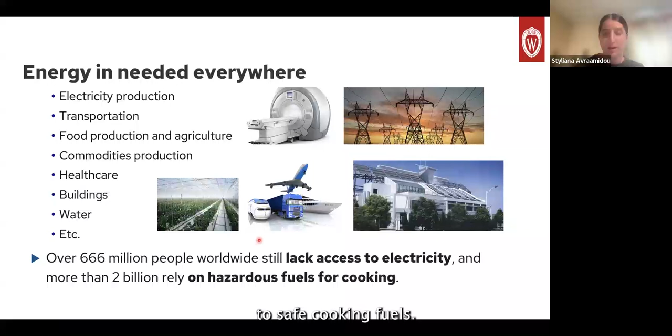Okay, so I'll start with a bit of motivation. We know that energy is needed everywhere. We use electricity all the time for our day-to-day tasks, and industry uses a lot of electricity. We use a lot of heat, transportation. Our food systems need so much energy for water transportation, irrigation, fertilizers, cultivation, and everything. So energy is super important for everything we have right now. At the same time, a lot of people don't have access to electricity or to safe cooking fuels. So we need it everywhere, although it's not everywhere.

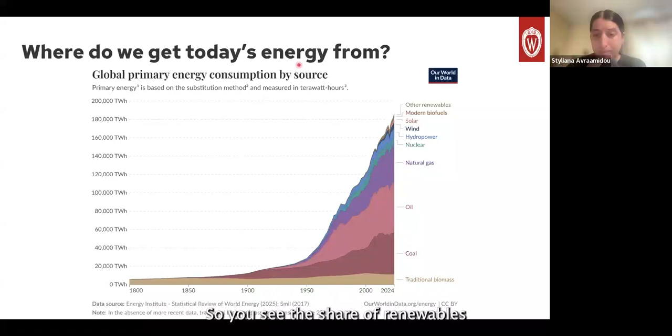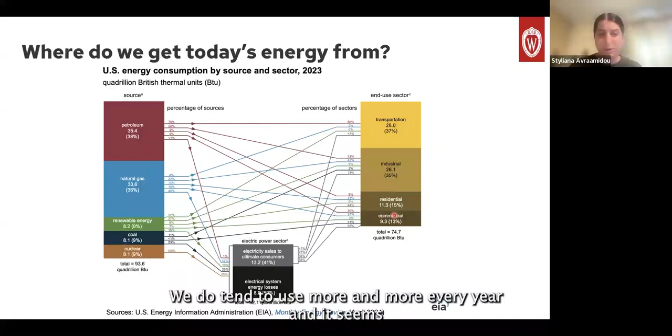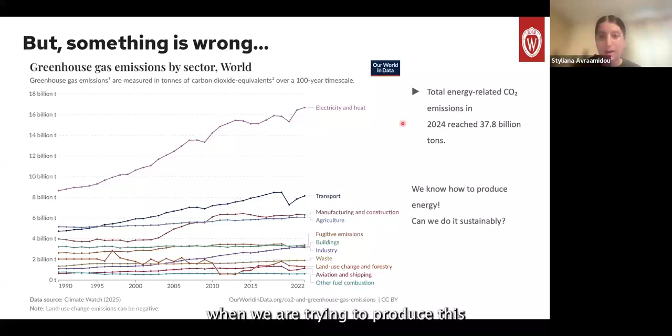So it seems like we have a lot of energy. We tend to use more and more every year, and it seems that we are good at producing it, but there is something wrong. All of this energy creates a lot of greenhouse gas emissions. We see here the amount of greenhouse gas emissions produced just from electricity and heating. Transportation is another huge part. We can clearly see that a lot of emissions come from the energy sector. So we know how to produce energy, but we are in a bit of trouble when trying to produce it sustainably.

Okay, so can we produce sustainable energy? And I'm sure that you know about a lot of techniques and processes and infrastructure that we can use to produce sustainable energy. We can increase the penetration of renewable energy sources. The technology is there. We can do more solar, wind, geothermal, etc.

We can improve the conversion technologies that we already have, our processes to become more efficient. We can introduce more heat integration to make our processes more efficient. We can even introduce technologies for CO2 capture and utilization that can help our energy systems become more efficient. And here I have a representation of some of the options that are out there.

We have many different primary energy sources. Some of them can be renewable, some are not. Then we have conversion technologies like turbines, solar panels, gasification reactions. We can convert energy to either electricity or some energy carrier, for example, hydrogen or natural gas. So we can transport it throughout the country or from country to country to then use it at the end for the end use. So we have all these technologies.

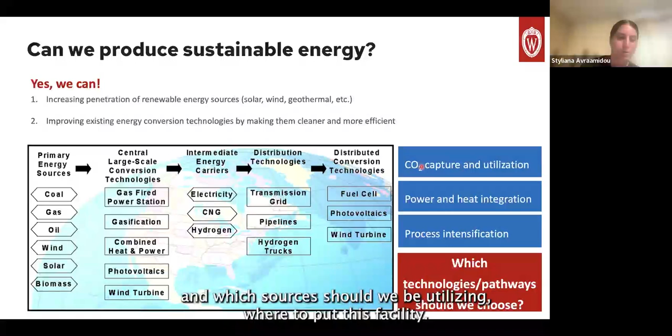Some of them we use more than others, but when we're considering decarbonization or moving to a more sustainable energy system, it's not clear which technologies we should be choosing and which sources should we be utilizing, where to put this facility. So that's what we are working on. The other thing is, should we just focus on greenhouse gas emissions? Are they the only challenge to our sustainable energy transition?

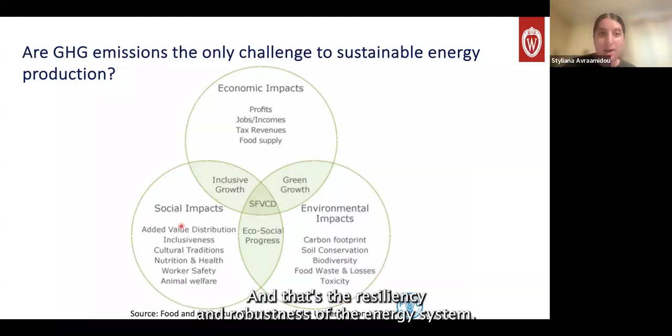And then it's not just the environmental impacts. We should at the same time be looking at the economic impacts and the social impacts that will be affected when we come up with a new energy system or when we're in the process of transitioning to a new energy system. And then I think there is something missing still from this diagram that is trying to capture all of these impacts that we are after, and that's resiliency and robustness of the energy system.

So I'm sure many of you have heard about the blackouts in Europe, in Spain and Portugal, or the grid failing in Texas a couple of years ago, and the issues that they still have in Texas. So we want to transition to a system that is resilient and that we're not at risk of losing power and risk of the grid failing with weather conditions or with demand fluctuations and so forth. So that's another objective function that we need to keep in mind.

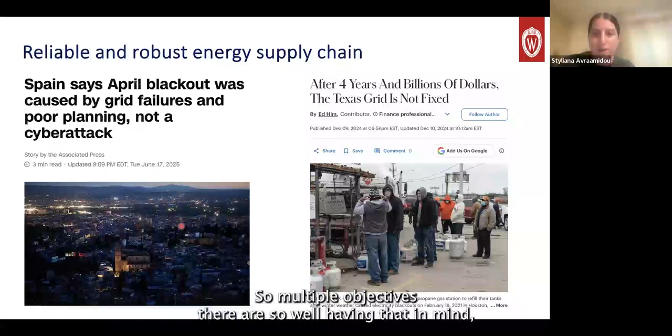So we have the environmental impacts, we have costs, we have social impacts like job losses and so forth, and then we have also the resiliency of the electricity grid that we need to take into consideration. So multiple objectives there. Having that in mind, we need to come up with answers to a bunch of questions, and I have here some.

So where should we produce the energy? Should we produce in a location that has a lot of sun and wind, or should we produce somewhere that there are a lot of people and need energy, or industries, or should we be transferring energy from one place to another? What are the best production technologies? What are the best conversion technologies? Should we be storing energy somewhere? Should we be using batteries everywhere?

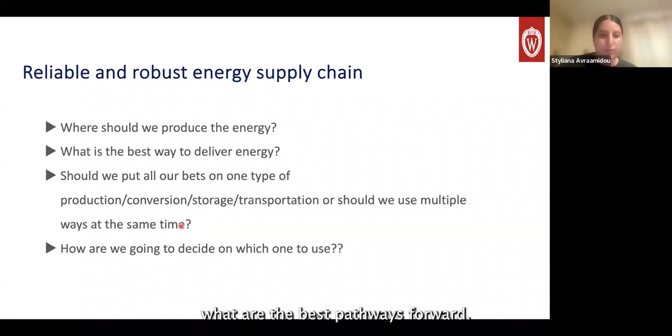There are so many questions, and each person developing a technology or company developing a technology might want to push forward that technology, but we're lacking a bit the tools to consider together all of these technologies and figure out what are the best pathways forward. Okay, so is this an easy problem to solve? No.

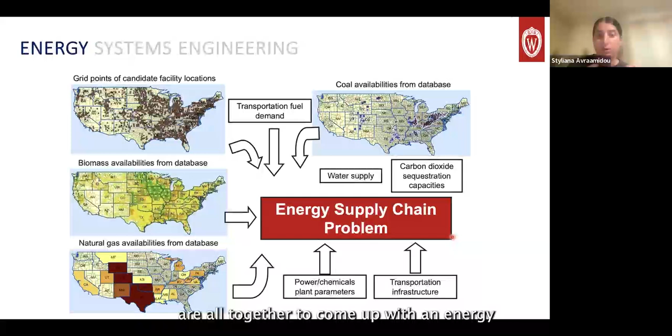So if we just take the US as an example, there are so many candidate locations to put in energy systems. There is different resource availability. So if we want to utilize biomass, we need to take the seasonality and the location of biomass availability into consideration. Natural gas availability is also varying from location to location. And we need to then consider all the transportation constraints and options, and all the demands of power and transportation all together to come up with an energy supply chain plan, essentially. So this needs to include all of our concerns and objectives that we just discussed.

So environmental, social, economic, resilience objectives. We need to connect all of these pathways and technologies as a network. And then out of all these options, that will be a lot, we need to figure out how to narrow it down to a smaller set of best options that can fit our concerns and objectives and help us make

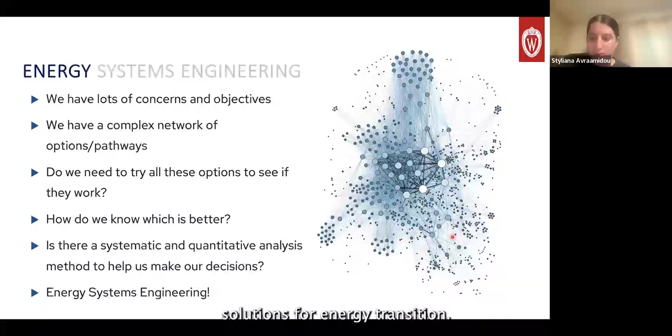these informed decisions. So the question here, do we just evaluate all of these options, or are we going to use any decision tool that can help us navigate this complex network of pathways that we have? And that's what the goal of this field of energy systems engineering is, to navigate all these different options and come up with best pathway solutions for energy transition.

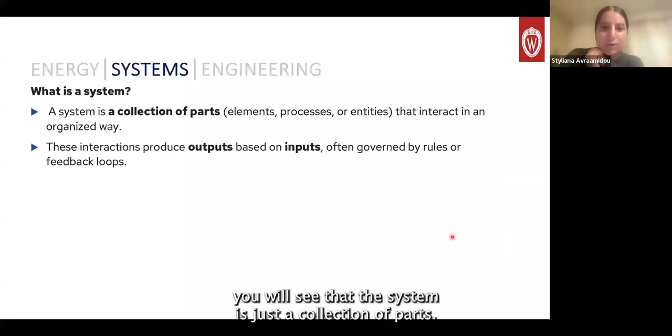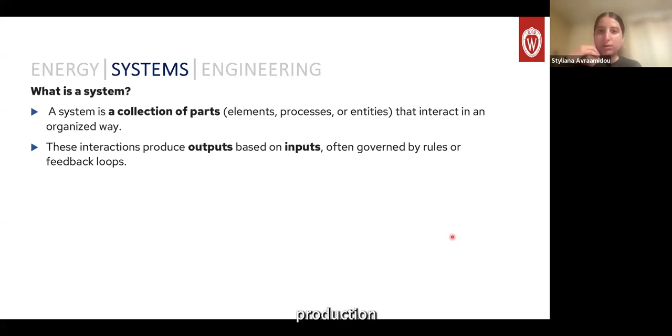Okay, so yeah, it's called energy systems engineering field. What is a system? So if you look into definitions, you will see that the system is just a collection of parts. This can be elements, processes, entities that interact together. So one is affecting the other. And they produce some outputs based on whatever inputs we have. And in the case of an energy system, these elements can be your energy production units, your energy storage units, your energy transmission units, and all the connected parts are going to be the system.

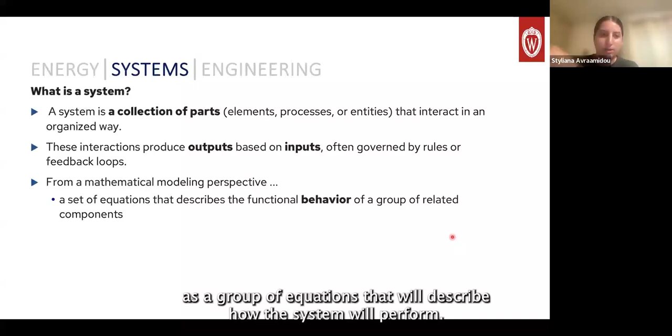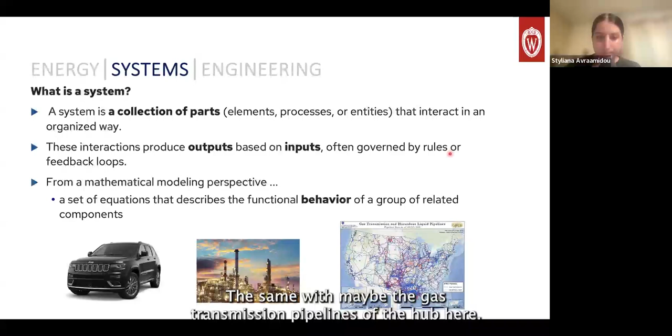Okay, so then what we're doing is again modeling the energy systems. We develop models to accurately represent what's happening in reality. Then if we have this model of what is happening in reality, then we can test different modifications and alterations of that system and see what the output will be. So we can figure out optimized designs of that system without actually doing the changes in real life.

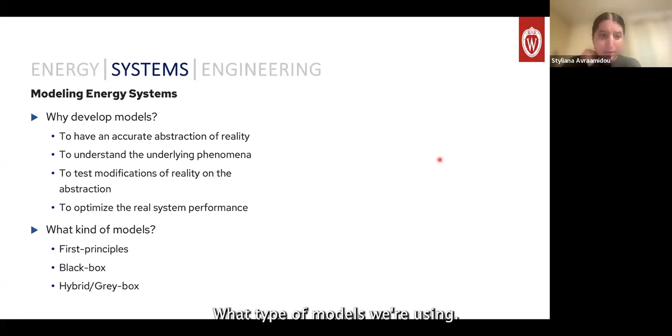What type of models are we using? We're using different types of models. So we have models at different scales and different levels of accuracy. The first principle models are models that use actual physics and chemistry to describe what is happening with a device, a unit, an element.

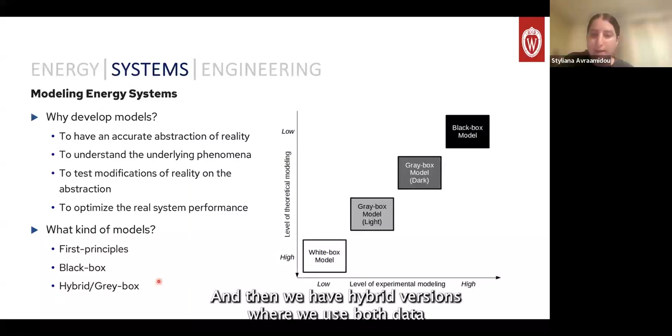Black box models are models that just use data. So if we have a system and we have a lot of input and output data, we can train some black box model that doesn't know any physics, but then it can kind of predict the outputs based on these data that we have collected. And then we have hybrid versions where we use both data and first principles to come up with models.

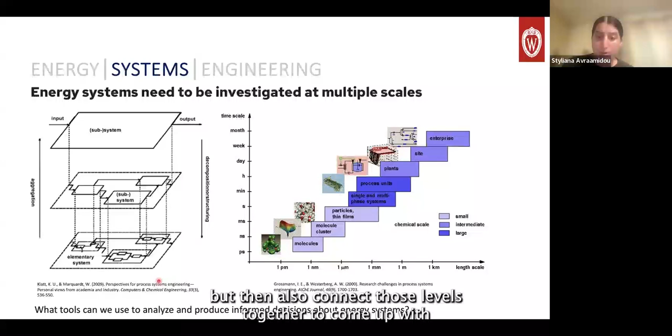Okay, so the other thing that I alluded to is the multi-scale nature of that. We have models of different scales to describe the entire energy system. So we're going from materials and units all the way to plants and power plants, and then connecting all those together to energy grids and energy supply chains. So we can use all these tools to analyze at the different levels, but then also connect those levels together to come up with energy planning solutions. Okay.

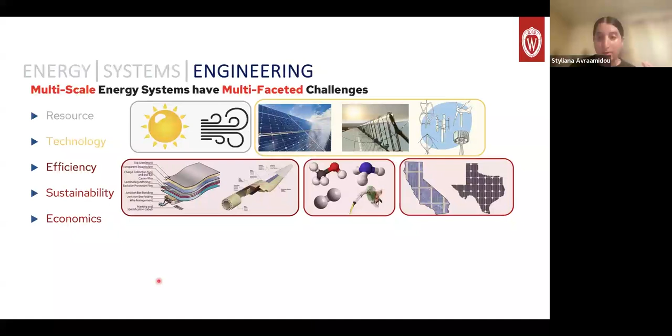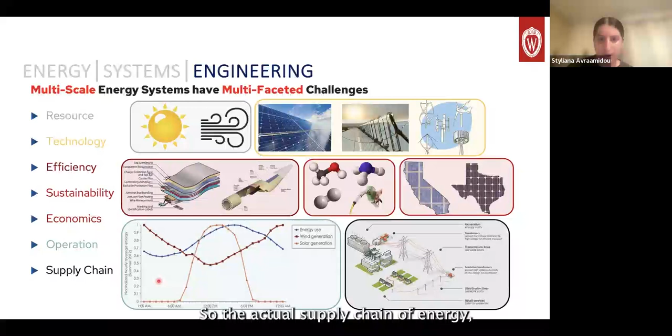Again, this slide is showing the different things that we need to take into consideration when we're building these models, and the fact that they're multifaceted. We take material information all the way to how the energy is distributed through the electricity grids, so the actual supply chain of energy. Okay.

So the models that we develop in my group are based on this multi-scale aspect. We're considering only two scales. The rest of the scales, we have models from other people that we can use. But the scales that we do consider is a short-term modeling, which is deciding the scheduling of our energy use, energy production, energy storage devices, which usually is at the hourly scale. So we have models that predict how energy devices and devices that participate in energy supply chains operate at the hourly scale.

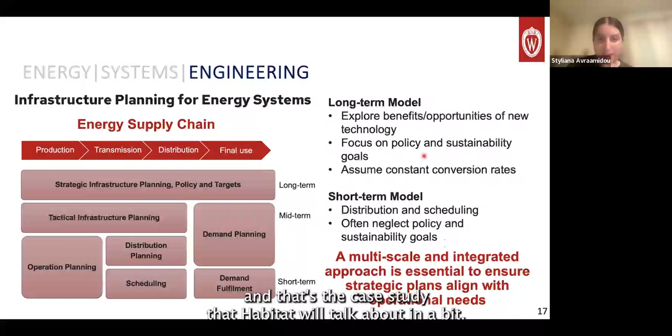And then on the long term model, we are coming up with infrastructure planning decisions. So building or decommissioning infrastructure in terms of energy supply chain at the yearly level. And this can span many years, like 30 to 40 years. And that's the case study that Javiera will talk about in a bit.

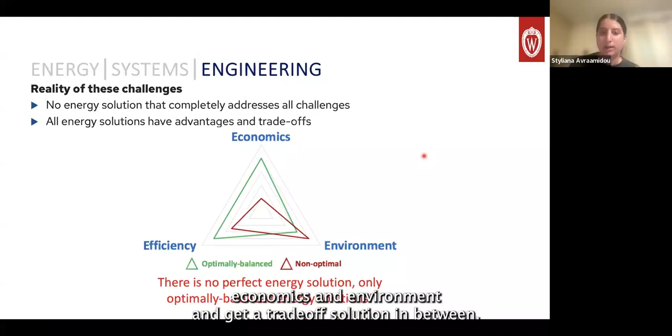So yeah, the reality is that we can build these models, we can get solutions, but these solutions will be good for maybe the economics or the environment or the efficiency, so we can define an objective function. But then we need these engineering tools that I will be talking to you about now to come up with trade-off solutions. So we build multi-objective optimization formulations where we can simultaneously consider economics and environment and get a trade-off solution in between. And I think Javiera will show some of those in a bit.

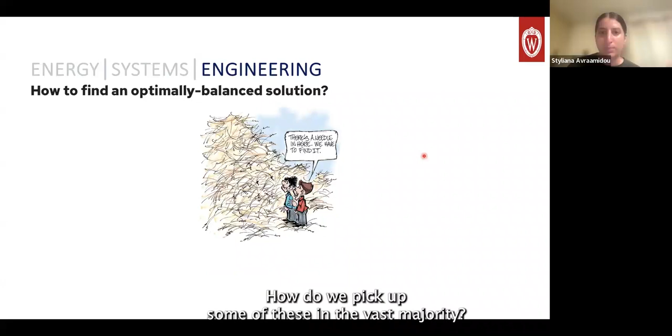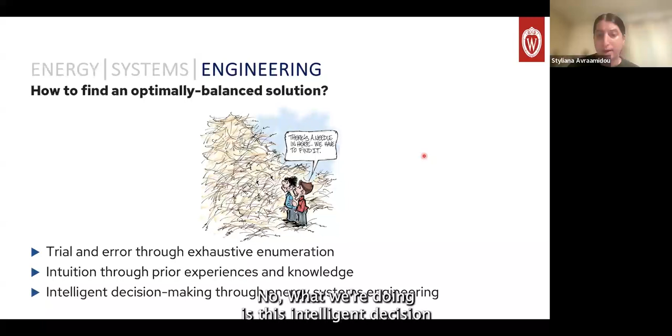Okay, so then I just said that we have all these different solutions. How do we narrow down the space of solutions? How do we pick up some of these in the vast majority? Should we just do exhaustive enumeration and just evaluate all of these points? No, what we're doing is this intelligent decision making through energy systems, which is the final part that I will talk about, using data analytics and optimization to come up with a solution to our optimization problems. Okay, so those are the tools that we're using.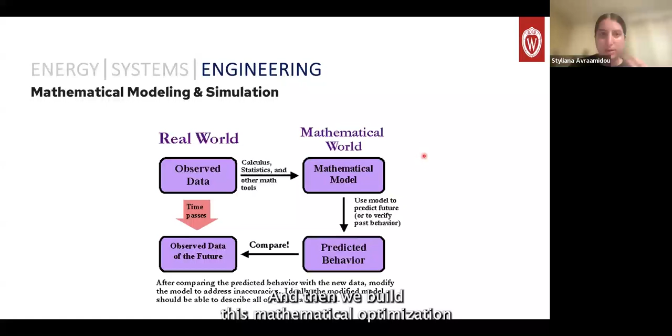We use a lot of data analytics, input and output data, both for the modeling part and the optimization part. We're trying to make sense of the data, get any trends that might be happening that we cannot see with the naked eye, and use that to find optimal solutions. And then we build these mathematical optimization models and simulations to describe our systems.

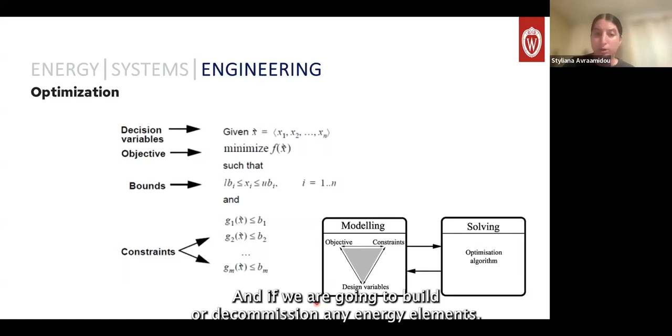The final will be the optimization. I think Javiera will have some slides on the campus for that, where we're giving an objective function value that will be our economics, environmental aspects, or social aspects. And then we're putting as constraints the descriptions or models that we have for each of the energy process units. So we have an objective, a set of constraints, and then our design variables are how to operate our energy units, and whether we are going to build or decommission any energy elements.

Okay, so all of this together makes what we call energy systems engineering. Here I have some relevant literature on that, and a schematic representation of our framework. So how are we actually doing that? We need to take into consideration the area that we are interested in. This can be an entire country, a state, a county, a small city, our campus, whatever size this might be. Then what are the technologies that we have as options for producing energy, converting it, storing it, delivering it, all of this.

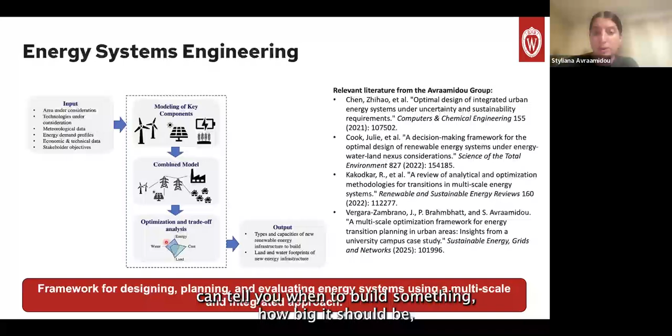Then what is the weather data? What is the past hourly data for that region? And then what are the demand profiles for both electricity and heat, or whatever other type of energy we're interested in for that region? And then any type of objectives that we want to capture. Then we build models for the different elements, combine them together, solve the optimization problem, and we're able to find different solutions based on our objective functions. These solutions can tell you when to build something, how big it should be, and what the actual footprints and impacts of these moves will be.

Okay, so this is my final slide before Javiera comes in and gives her example. The other unique thing that we're doing compared to other energy planning works is that instead of considering only one type of demand, like just electricity or just heating, we are integrating these energy demands together, because we know how interrelated energy systems are. If we change our heating systems to be electrified, that will directly change the demand for electricity. So we consider heating, cooling and electricity at the same time, and we're able to come up with somewhat more complex models that capture all the different pathways and decisions we need to make for energy systems.

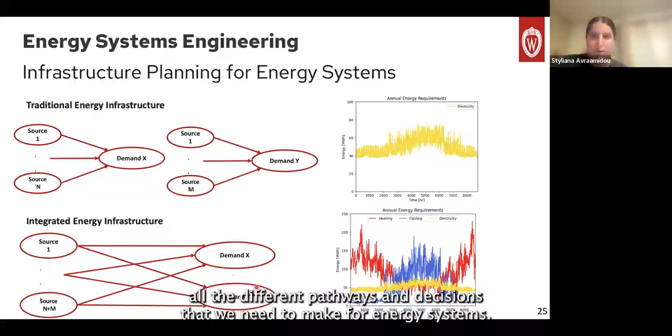So I'll now stop sharing and let Javiera share and talk about her case study on the campus energy transition.

Okay, can everyone see it? Yep, I can see.

Okay, perfect. So what I'll be talking about is how we apply all the systems engineering tools to a specific case study on our campus. I will start by sharing a little bit about how energy is supplied on our campus. So this is a map. If you have walked through the south or the west of campus, you may have seen a steam cloud. That steam comes from our heating and cooling plants. There are 3 plants on campus, one on Charter Street in the south, and 2 in the west. One is Walnut, and the other is the West Campus cogeneration facility.

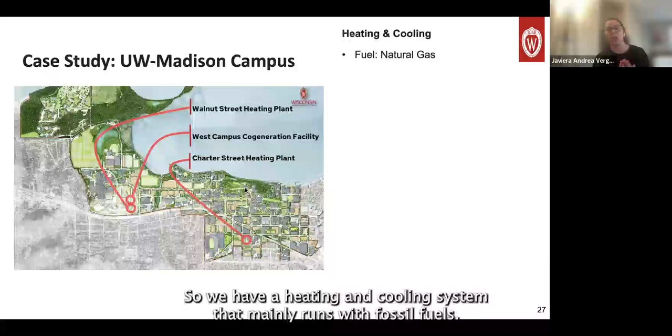West Campus also produces electricity, but currently all the electricity goes to MGE. And all these three plants are fueled by natural gas. So we have a heating and cooling system that mainly runs with fossil fuels. On the other side, we have the electricity supply through Madison Gas and Electric, having their own goals.

And there's also an incentive to install more renewables on campus. We have some rooftop solar in Gordon Dining Hall, on the Arboretum Visitor Center. And there's also the O'Brian Solar Field, where the university is part of the renewable energy rider, so they obtain carbon credits through them. But the reality is that less than 0.1% of the campus electricity usage is generated from renewables.

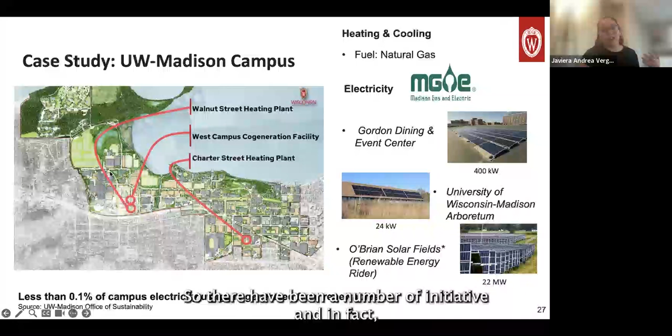So there have been a number of initiatives, and in fact, last year you must have heard UW launched the sustainability initiative, and I want to focus particularly on the second one. This says procuring 100% renewable electricity on campus by 2030, and also achieving net zero emissions by 2048 or sooner. So our current situation is not great.

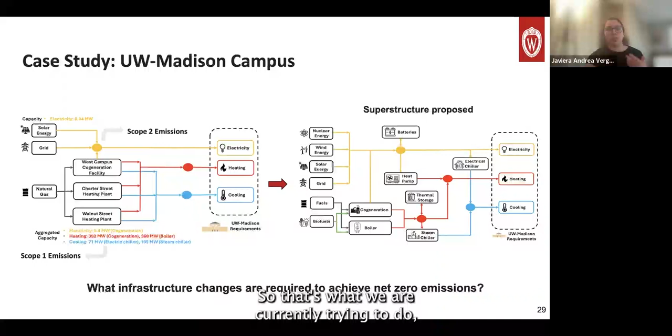We have a system that mainly relies on fossil fuel, but our real question is, what do we need to change? What are the infrastructure changes required to achieve net zero emissions? And that's where tools and our field come in. Let's propose new alternatives. Let's study, let's see what's bad, let's see the trade-offs. So that's what we are currently trying to do, and that's what I've been working on the past couple of years. So let's start first with how we do it, what's our idea, what goes behind.

When we think about modeling energy, we really talk about problems that have millions of variables. And this is because we need to model sometimes hourly. We think of the number of hours in a day, the number of days in a year. Each variable, if we only model a year, could have 8,760 steps. And that's only one variable. So we have millions of variables, millions of constraints. This is really difficult to solve.

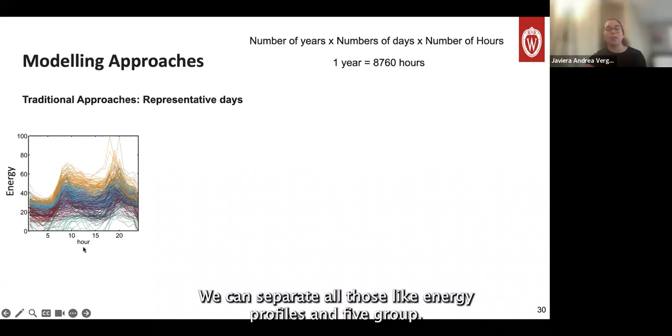So what traditional approaches have done is use this approach called representative days. We have energy profiles, we have weather profiles, and what we would do is try to group certain days, defining certain criteria for similarity. So let's say we form 5 groups. We can separate all those energy profiles in 5 groups, and then for each group we will find one trend that will represent it. That's why it's called representative days. So we can say we have 5 days that will represent my whole year, and we'll have a percentage of how many days it happens in a year.

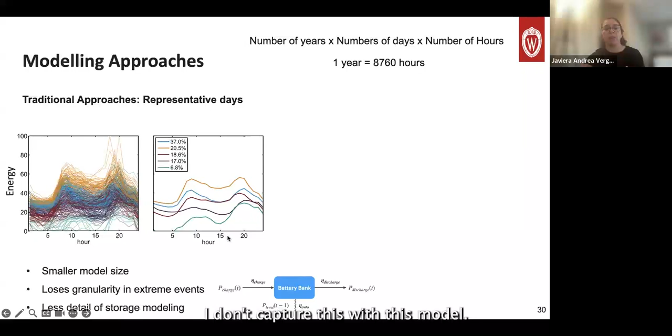This approach is very useful because it could reduce the size of my problem, but it has certain cons also, and one of them is I will lose all these extreme events, for example, all these peaks here, or if I have no energy demand, or I'm not producing energy, I don't capture this with this model. And this is specifically important when we talk about storage. When we think about storage, we think about a box, and the only way of knowing how much I have is knowing what I had the previous step. So I really need the accuracy and a full resolution when we are modeling storage.

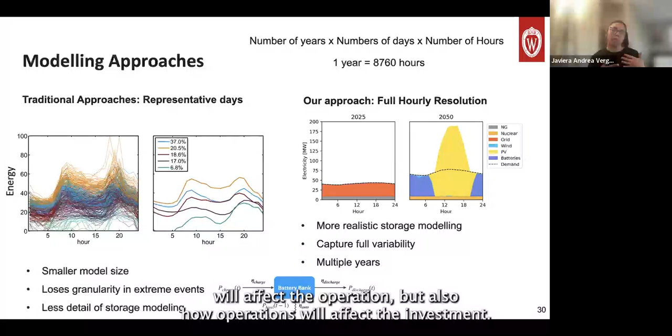And that's why our approach is about full hourly resolution, where we are trying to model more realistic storage. We are also trying to capture the full variability of renewables particularly. And we also want to try it for multiple years. We are interested in seeing short-term solutions and also long-term solutions, and how the investment will affect the operation, but also how operation will affect the investment.

So why does this matter, and why does full hourly resolution matter? What I show here is a duck curve, and this describes how the net electricity demand changes through the day. The net electricity demand is the total demand minus the renewable generation. And this is in California, particularly with solar. In the morning the demand rises as people wake up and start using electricity. So that's why we have the peak here.

Then what happens midday is we have high solar generation and lower demand, so that's why here it drops. And in the evening, again, solar generation falls and the demand rises again. So this looks like a duck curve. And the challenge this brings is we have overgeneration during the midday. We have to ramp up at certain points and we need certain flexibility. So we really need to capture all this variability, especially when we consider renewable energy in our models. And if we want to have a reliable system in the future, we need to account for this.

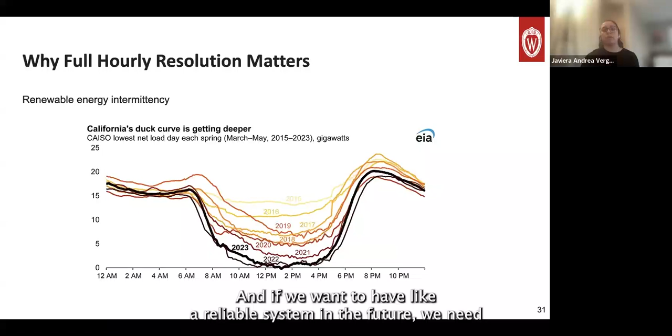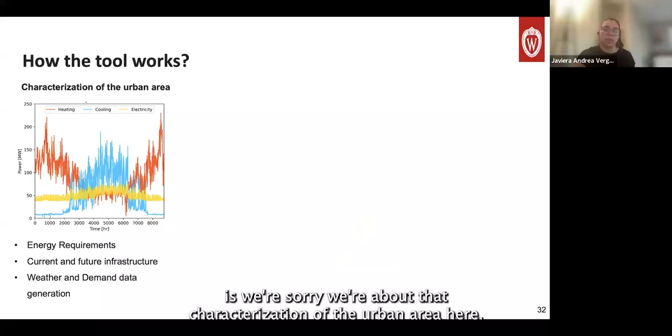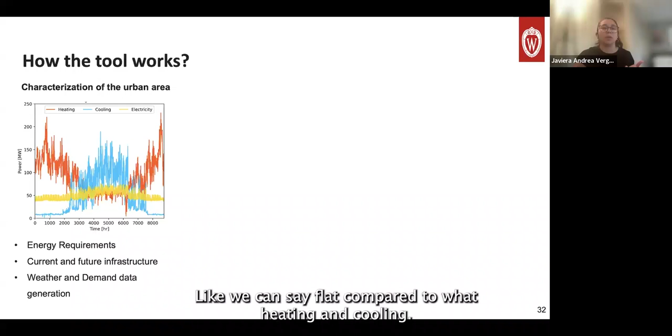So let's go back onto how the tool works. Very simply, we start with the characterization of the urban area. And here I show what's actually the demand of the campus. We'll start seeing that electricity is really, we can say, flat compared to heating and cooling. And this is really important to propose solutions: when do we have peak demand? What type of demand do I care more about in each season?

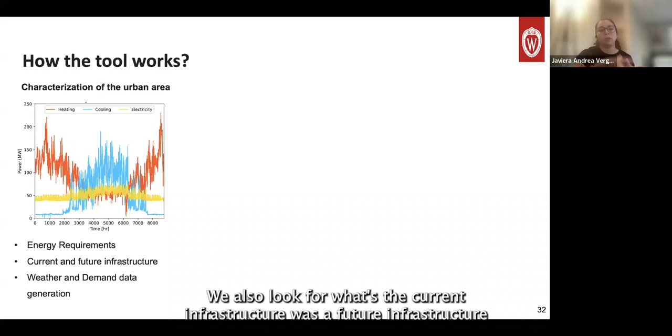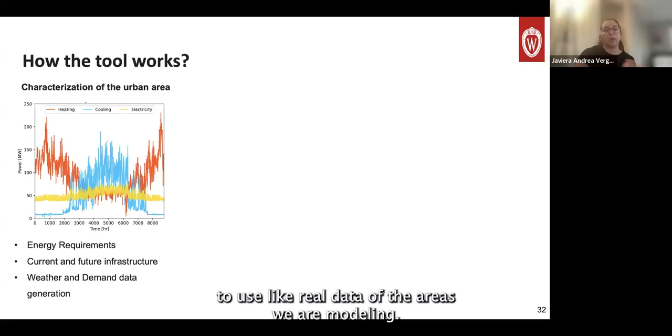So we identify energy requirements. We also look for what's the current infrastructure and what's the future infrastructure. And we also do weather collection and demand data generation. So we try to use weather stations to use real data of the areas we are modeling. Then we go into the mathematical modeling. So we have the current infrastructure, we talk with stakeholders about what options they are looking for, and then we propose all the alternatives.

When we talk about an optimization problem, we are trying to find the best solutions, but we have a number of alternatives. As Styliani mentioned, we use this multi-scale approach within this type of tool: decisions are hourly when we talk about matching the demand, annual, or every couple of years, for investment, and then long term, like reaching net zero or a certain target of emissions.

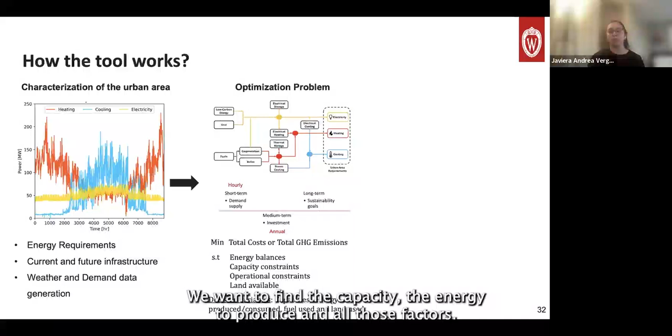So the mathematical model will be minimizing either costs or emissions. And we want to satisfy the energy demand subject to the capacity of each plant, the operational constraints of the equipment, and the land that we have available. So we want to find the solution: the capacity, the energy produced, and all these factors. And then, once we state this problem, we go into the implementation and solution.

So the strategy we follow is we first talk about single objective optimizations. This means we look only at minimizing costs or minimizing emissions, and then we ask what if we care about both? What happens? That's called multi-objective optimization, and then we do some sensitivity and scenario analysis to see trade-offs and what parameters affect our problem more.

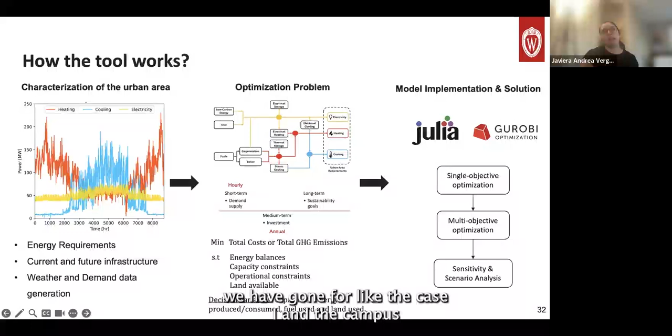So I will show you now the main results we have gotten for the case study of the campus. The first thing, looking at the goal of reaching 100% renewable electricity in 2030, we found it was not possible. And this is because MGE will not reach 100% renewable electricity in 2030. So we really need to align our goals and work together for this. That's one thing to consider in this type of problem.

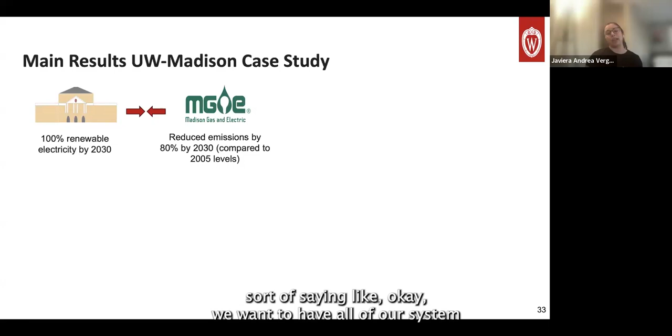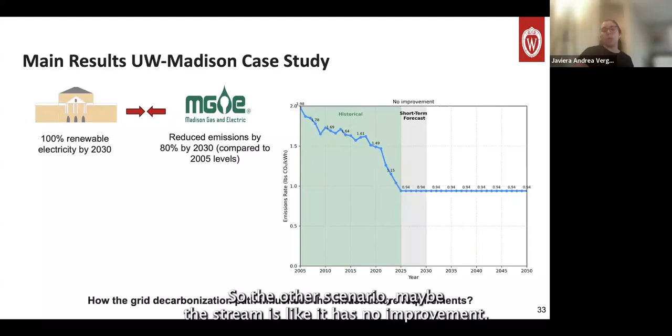We want to have a reliable system, and that's why we need the grid. And looking at the path of the grid, one of the questions we started thinking about was: will we rely 100% on the grid, or what happens if they have a delay, how will it affect us? So the other scenario, maybe a little bit extreme, is that it has no improvement. So how does grid decarbonization influence the infrastructure requirements? That led us to four scenarios: minimizing costs, minimizing emissions, and considering a scenario where MGE reaches net zero emissions, or a more pessimistic one where that is a little bit lower.

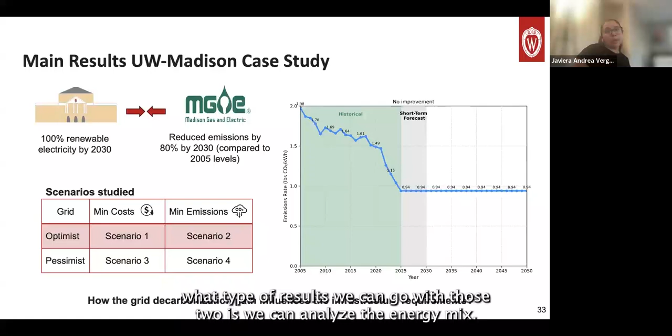So what type of results we can get with these tools is we can analyze the energy mix. In our current scenario, we have electricity either from the cogeneration facility or from the grid. In a more optimistic scenario where we want to reduce emissions, we have a higher penetration of renewables. But if we look to minimize cost, it's also convenient to install renewables. So that's a good thing: we also have an economic incentive to install renewable energy. In the more pessimistic case, we rely a little bit less on the grid, but we also want solar renewable energy. So that's important, we have an economic incentive.

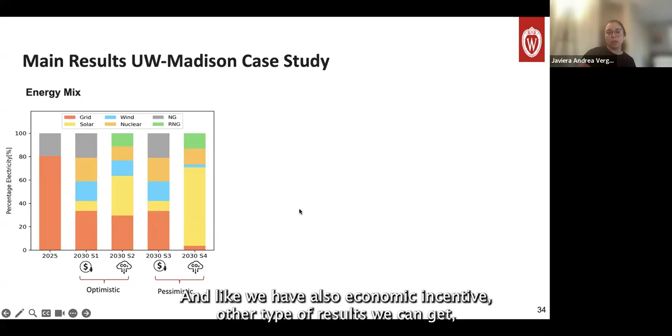Another type of result we can track is the annual costs, how much more expensive the system will be, and why it will cost more. We can talk about big numbers, like my investments this year will be this much, but we can go deeper into which technology will contribute more. And what we found is we need more renewable energy; in terms of cost we have benefits, in terms of emissions we have benefits, but we need a lot of storage. Around 40% of the cost needed for the system in the next 25 years comes from storage. So an important point is how these technologies develop, like batteries or any other type of storage.

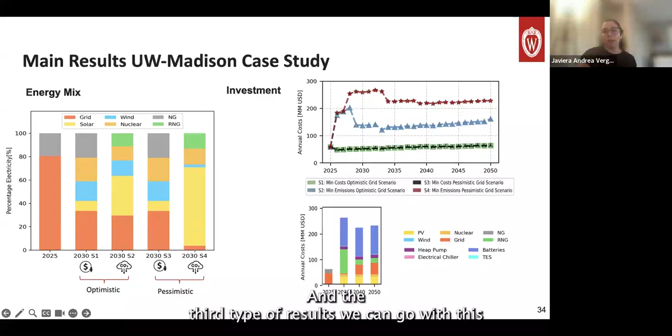And the third type of results we can get with this tool is talking about operations. So we talk about investment. We also go into how it operates; specifically, this goes into how we use the current infrastructure. So I want to show the case that is more interesting, about cooling. Right now, what we have, we use natural gas. So 100%, every day, goes with natural gas.

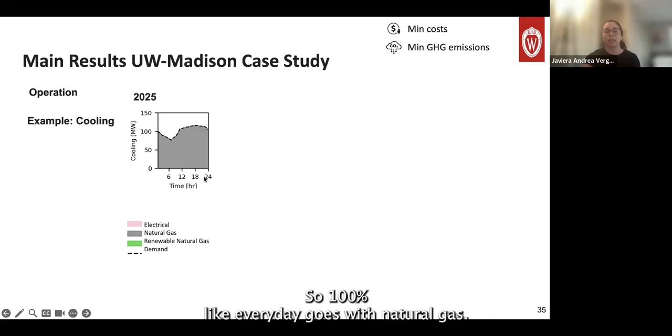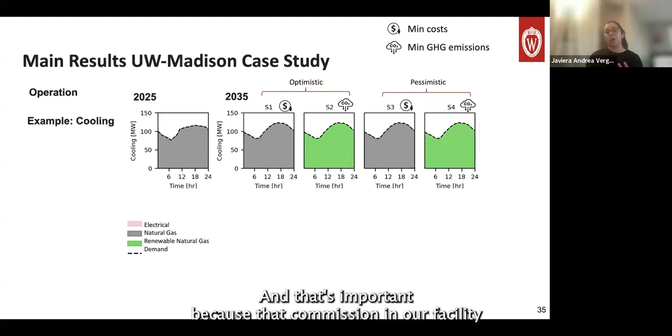When we go into 10 years, let's say, we see a change depending on what we care more about, if we minimize costs or emissions. We see this change from natural gas to renewable natural gas. This means in every case we are still using our current facilities, and that's important because decommissioning a facility, one, is expensive, and the other thing, we cannot just shut it down because we want to use our technology. We have to consider all the other impacts that go there.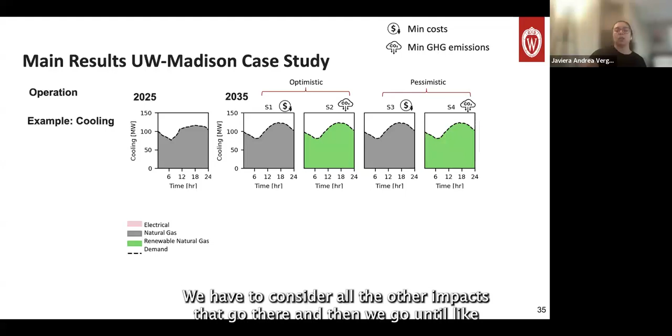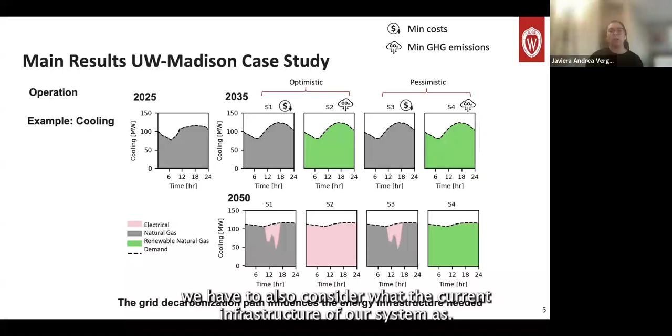And then if we go into 2050, let's say 25 more years, we start seeing other changes, more electrification. So we see short-term solutions, we use natural gas, renewable natural gas. Long-term solutions, we start with electrification, and that aligns with the electricity having less emissions. So really the grid decarbonization will influence our infrastructure, and we have to also consider what the current infrastructure of our system is.

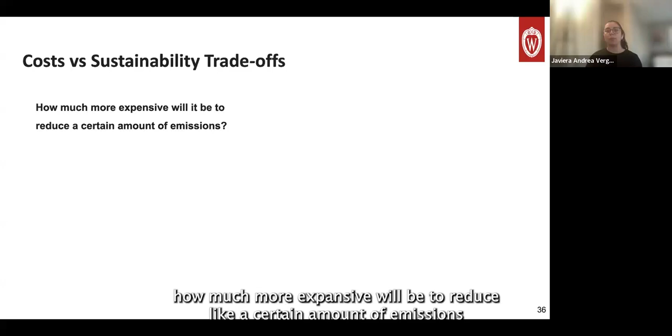And the last thing I want to go into is, let's analyze the trade-off. One of the questions here is how much more expensive will it be to reduce a certain amount of emissions. And with optimization, we can build this type of figure that is called the Pareto front, where we have emissions and we have costs and we can analyze the trade-off. So basically, how we can read this is we have here the baseline on the top. And we ask a question, well, if we reduce emissions, how much more expensive will it be? And we see it's around 30%. So this lets us see what the influence of the budget will be.

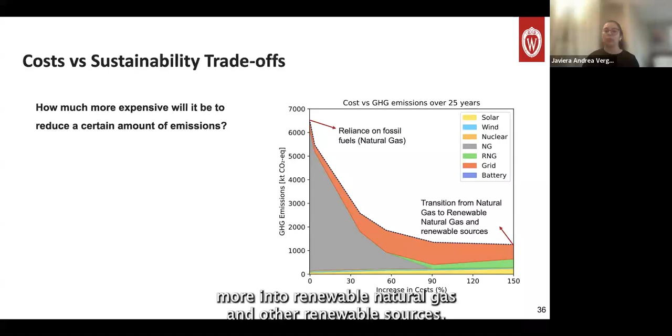So on the top end, we have higher emissions because we rely mostly on fossil fuels like natural gas. At the other end, we transition more into renewable natural gas and other renewable sources, and that's why emissions are lower, but that also comes with higher costs. So we can analyze different scenarios with this, and the main conclusion is we need to balance costs, emission targets, and also the land efficiency to install all the renewable energy we will need.

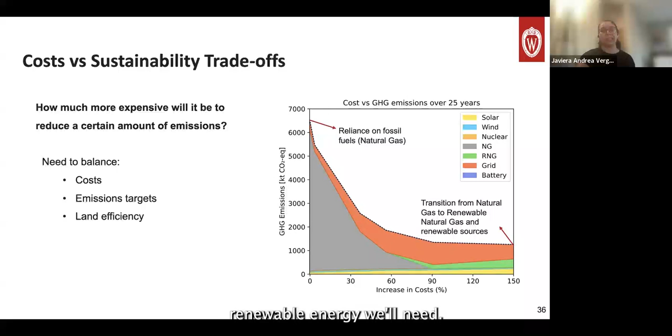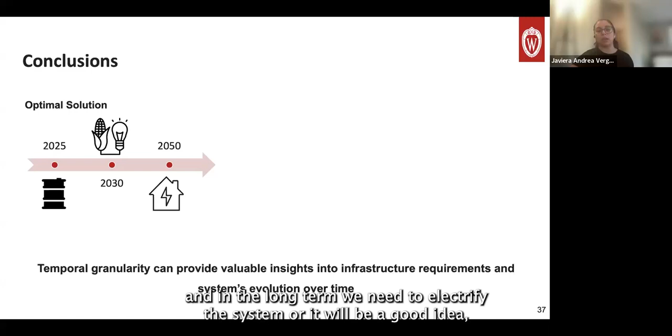So the main conclusions we have come up with are really the importance of temporal granularity and the insights it can provide. For campuses specifically, a switch in the next 5-10 years to renewable natural gas would make a huge impact. Of course, there are policies that are required for that. And in the long term, we need to electrify the system, or it will be a good idea, but only if we can have renewable energy for electricity, of course. And the other thing is thinking about the grid, how it influences our system, and all the effort that stakeholders have to do together.

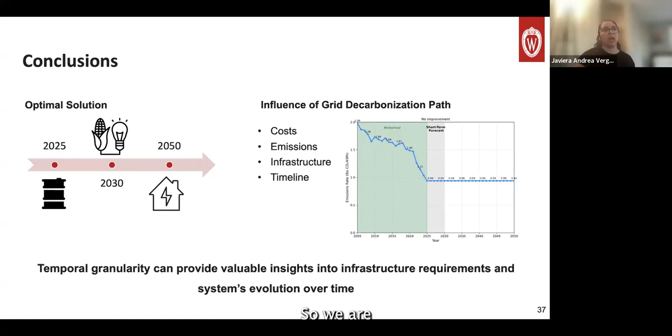So with that, Selena, I don't know if you want me to keep sharing. Yeah, keep sharing because it's just the slides. Yeah.

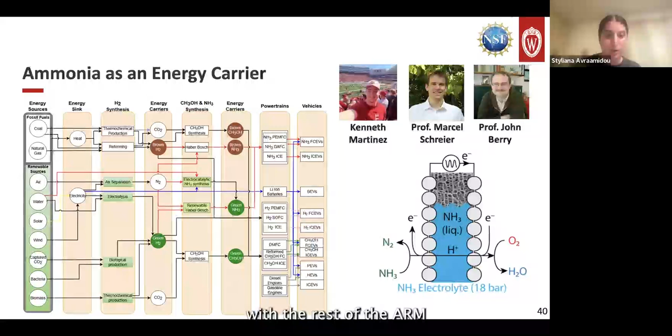So we're modeling the production of ammonia, using ammonia as an energy carrier, using just petroleum fuels and so forth, and then coming up with a set of parameters for the experimentalists to tell them, okay, your device should have this much efficiency and cost this much in order to be more competitive with the rest of the technologies that are already out there.